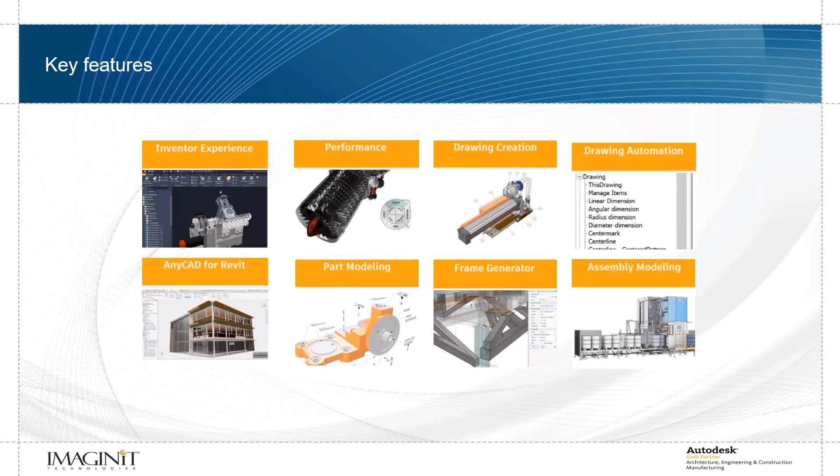So the first one I want to take a look at is just the Inventor experience that you get into, how we actually work with the software. And we have this idea of a dark mode now. The software has moved to this instead of having that really bright screen in front of you. My presentation today is not in a dark mode, obviously it's very bright, and that's kind of where I came from with software, it all looked like that. But now we're moving to these dark modes where it has that same look and feel, but it's got this dark sense to it.

And while this is great, I actually like this. I tend to work in lower light conditions, so not having that screen shining at me with that bright blue light coming off of it. I like the idea of the dark mode. It's almost dark mode though. So this is cool, it's easy to switch, and I can show you in a minute where that's at. It's an easy switch to that, but not all UI elements are affected by it.

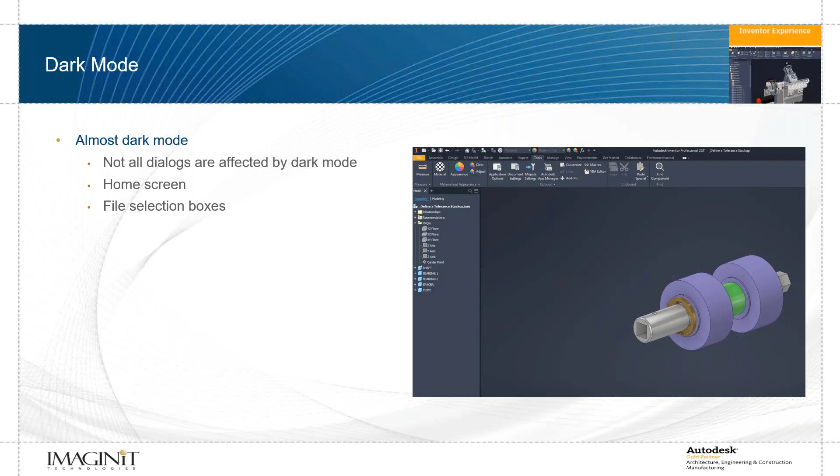My home screen, file selection boxes, projects, I think some Vault stuff - when you hit one of those, it becomes very clear that this is an ongoing process. Most of it's dark mode. I heard someone refer to it as a partial eclipse mode because it's getting close, right? They will still have certain things. If you're not careful, you will need sunglasses. If you're in a very dark room, working along, and you go to open a file, it will be very bright. So dark mode is cool, and it's almost dark mode.

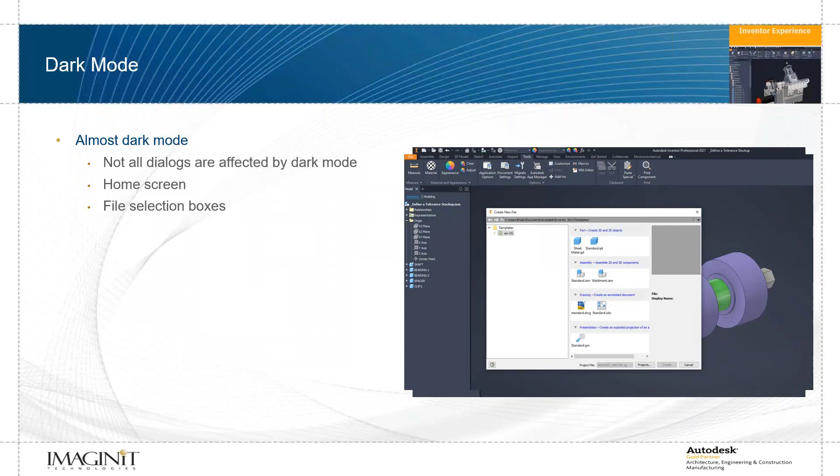We're getting there. The user interface continues to change, and this is something we have seen change, update, and generally speaking, has changed quite a bit since we've gone into this. In the past, we saw the hole command went to a property dialog box. And we saw the extrude and revolve move to a property dialog box. Now we're seeing a lot of other tools begin to move to this properties dialog box.

For me, I know when AutoCAD switched, for example, to the ribbon from the standard toolbars, it was a hard move. I was fine with it, but I get that - you're used to something and it switches. This doesn't feel like that to me. These properties, this just makes sense how this works. Instead of having this dialogue that's in your face, these appear when we need them, and they go away. So personally, I like it. I'm glad we're moving toward that.

So all of these are in here. A couple more, I think decal is going to be one of them, and there's one other that I can't recall right now that's been added to this. So this is almost all of the geometry creation tools that we're typically used to working with have now moved to a property palette set. And that's one of the big things Autodesk is focusing on right now in terms of the interface, moving it to this modern UI experience and changing that user experience so it's much more intuitive, much more heads up, and we can just work in a straightforward manner.

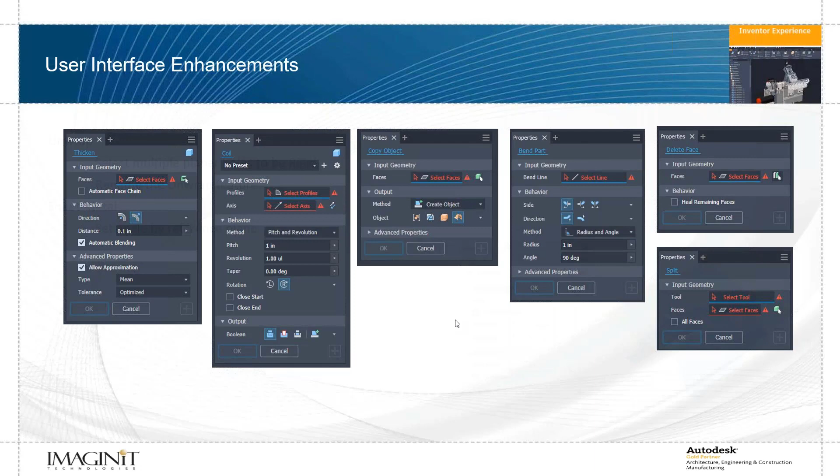With part modeling, there's just a couple of things that stood out, and they're enhancements to tools that are already there. I like to talk about the things that really have weight for me, and this one doesn't quite as much. But the unwrap command, this came about last year, we saw some of that. Now we can select multiple holes to be rigid - before we could select one hole, now we can select multiple so that it locks it down, and it changes the way the unwrap feature reacts. You can also now rename the unwrap feature. So it's just an extension of some of the tools we had before.

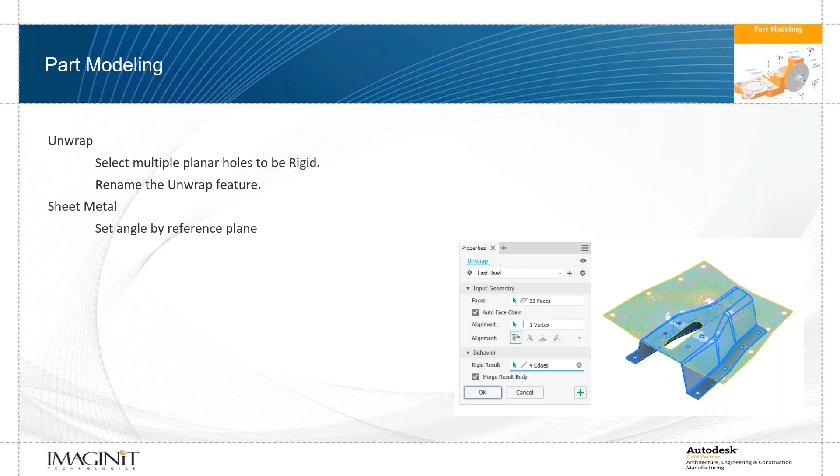With sheet metal, if I have a plane that's at an angle, I can set my angle by choosing a particular plane. Before we had to put in 60 degrees, 46 degrees. Now we can have that driven by an angled plane, and it will change and update with the angled plane. So, again, it's an addition to what we've seen before. It's not, to me - that's cool, great, some new features we have, but that's not something that jumps out at me.

One other thing I didn't include on my slide, but I was playing with it: you can select features by windowing now. Before, we could only do it by clicking and holding control and clicking multiple features. We can select features via windowing now.

So part modeling is getting pretty mature. There's always a few things I'd like to see. Last time we saw the solid sweep, which was a cool addition. I'd like to see some changes happen with sheet metal. But overall, the part modeling side of Inventor has become really robust and mature, so we're not seeing as much change or updates to that.

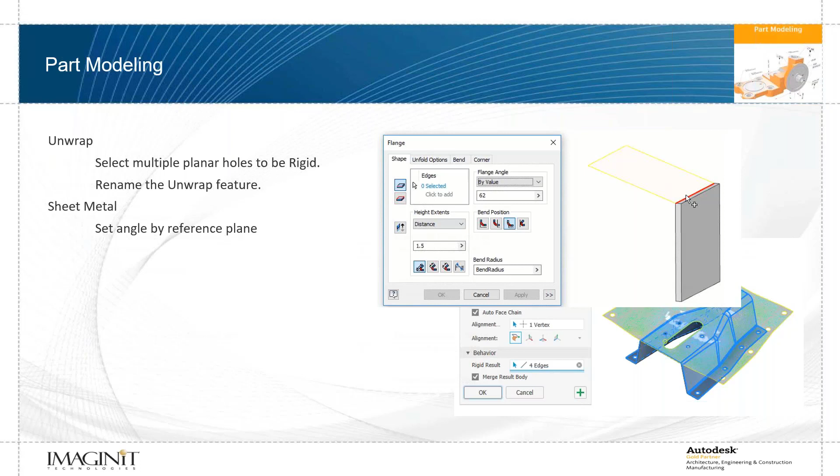Assembly modeling - whenever I think about what I'd like to see in assembly modeling, it'd be interesting. I like that they added joints. There's some things I'd like to see with constraints - I'd love to update constraints a little bit and do some things, but I don't really have an idea how. And then something comes along like this where I'm like, man, I didn't even know I needed that.

The file naming enhancements that started with frame generator, we're now seeing with mirror and copy, where I can specify in Inventor how I want a file to be named when it's mirrored or copied, or more importantly - I'll show with tube and pipe in a minute - I can call out every single part of that. This becomes so important when we move to a vaulted system, when we're using another tool to handle that data for us. It's really important that we have those names the way we want them, following our format.

Inventor 2021 has really updated that, so I can create a file naming scheme for these components within Inventor that follows what I'm looking for and makes sure I have unique information for each one. We can have index numbers come in, we can have it in a lot of different ways. We've seen it before with frame generator, and now we have it with tube and pipe, and mirror and copy. So that I like a lot.

Along these lines, this is something I don't know if I knew I needed, but now I'm so glad it's there. When you save a file - and everybody who's worked with Inventor has seen this - you go to save a file and it says, hey, I need to update, you're saving an assembly, I need to update these 3 other files as well. And you're staring at it going, I swear I didn't change those. Why is it looking to update? Why is it trying to save those files? Well, now in the dialog box, it will give you information about why it's trying to save those files.

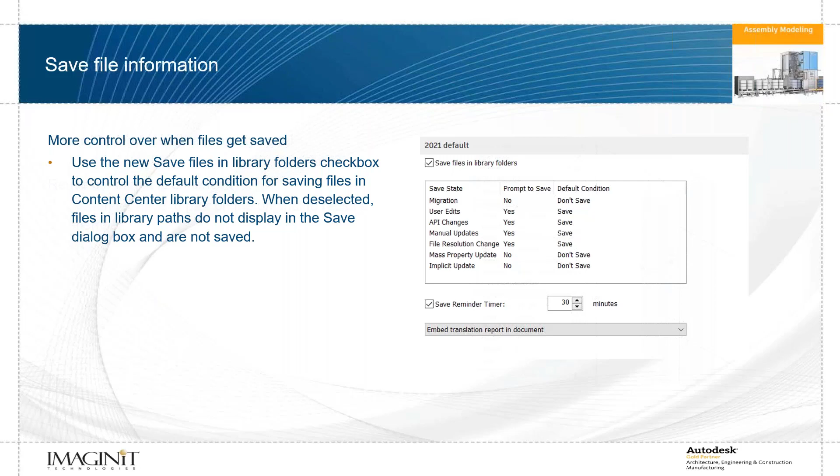All right, I'm going to do some software here in a minute because I like the frame generator. It has a property panel, like we've seen with the other tools that I was showing. They've got the new property panel that's part of that, and frame generator now has a property panel that's part of it.

They've also updated the reuse command. In the past I had to pick on the original member to reuse it. So if I had a whole bunch of tube and I was using these square tubes running across here, and I'm like, oh, I'll just use another one of those - who knows which one of those was the original? I have to really dig for it. Well, now I can pick on any of those and reuse them.

So I'm just going to point out a couple of quick things about just how this works. It's much smoother, it's much more responsive, and just a little bit easier to use.

So I'm going to jump up my Inventor here. I think I am - there we go. So this is, I'll bring this. This is just a little shell that I've created, and I'm going to use it as a frame. And I'll throw this out here.

If you are not using extrusions to generate frames, I will suggest it. It's a great way to leverage - instead of having to draw each one of the sketches out, I just have an extrusion, and I'm basing some of the information just off that extrusion then.

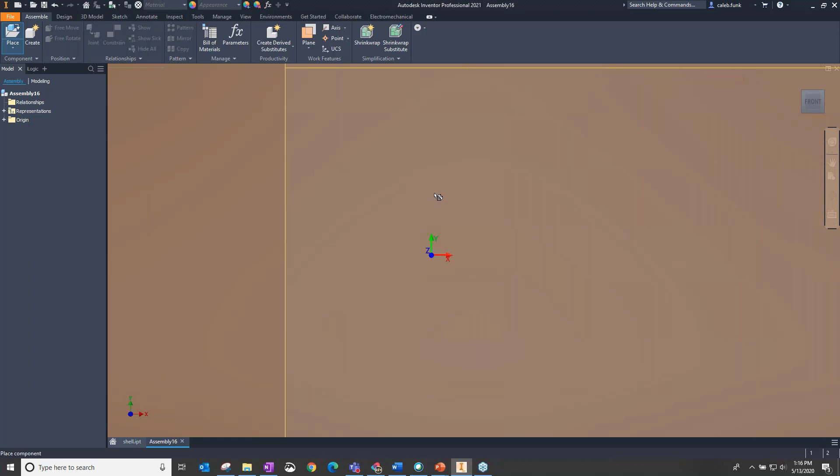So we'll go ahead and just drop this here like I typically would, and I'll go ahead and save that. I'll just give it the same name, that's fine. I went too quick there because it actually had a thing that said how many files are we saving and what are we doing, and I jumped by it.

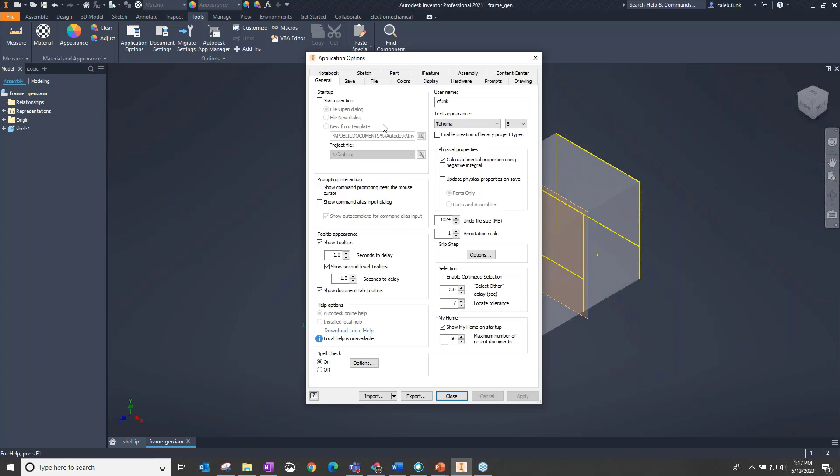A couple of quick things before I jump into frame gen. I mentioned these a little bit, but if I take a look at my application options, it's under colors where you can change that from the dark theme to the light theme. I'm going with the dark theme, especially for the purposes of this.

The other thing I'll point out, I'll just jump back to this. While I'm here, I mentioned all these tools - delete face now has a property palette and some other things. One thing that surprises me, at least it did when I first got into it, fillet still looks the same way, and you'll notice it's not affected by the theme that I have.

I've got my dark theme, and fillet and chamfer, nope. They look exactly the same. Shell does too, and that kind of surprised me.

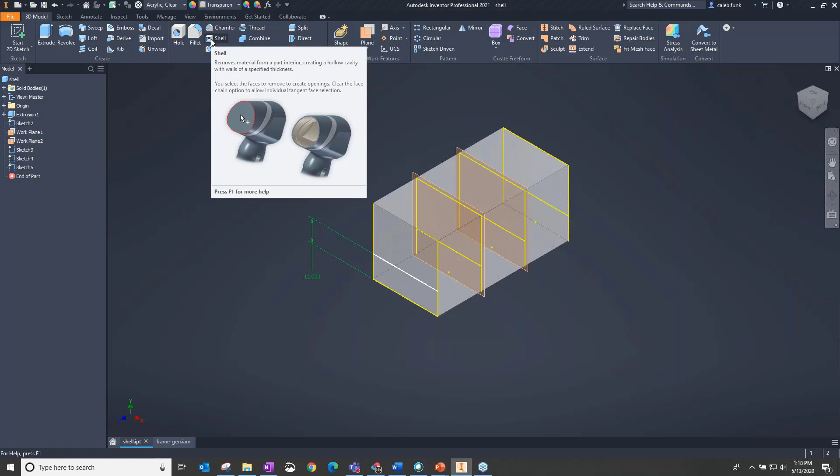One thing I'll say is that Autodesk has been working, particularly with the extrude tool, they've added new options to it. It's not just switching it over to a different panel - they've taken the time to actually update the command as well. So I think we're going to see that in the future, different new options with chamfer.

Total wild guess here - I've got absolutely nothing to go on other than just what I've seen with the other tools. But that is my guess why those aren't there, because it did kind of surprise me when I first picked on it and that old dialog box popped up.

I'm going to go over to frame gen, and I'll go ahead and go in here to my generator. I bring this up, and I'll just go with a square tube, 2x2. Yeah, it's fine, I'll just put in some simple square tube.

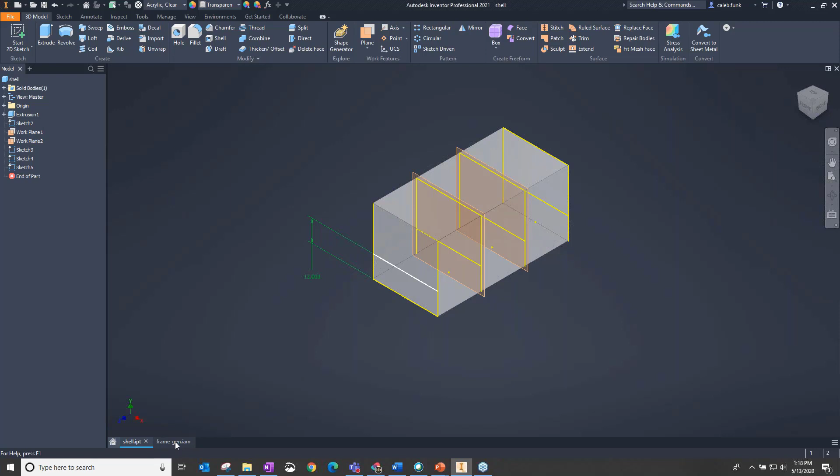So a couple of things I'll point out about this. First of all, we can see here, it really depends on how your lines are drawn in terms of which direction your frame is going. Everybody's experienced that - sometimes, oh, I didn't realize it was going to go that way.

Now I get a couple of things. I get a profile of what I'm going to be working with, and it shows me what it's going to consider the start point. And as I move around this midpoint here, you can see it switch back and forth, but I'll go ahead and place that one there. So I've got a start point and an end point for it. And this is just some feedback we just literally didn't have before.

What was a start point, what was an end point - actually, I don't want to use that one. I apologize, I'm going to cut back in because I'll just reuse that. I was just figuring out that start point and end point thing. So I'll say okay, yeah, let's go with that. That sounds great - put one across the top and one here in the middle, sure.

And I'll say okay. So my naming - you notice I've got frame and it's got this name that comes out here and it goes on. It says a skeleton, and it's got a similar name, but it's got an 80 instead of 79. I'll just point this out real quick.

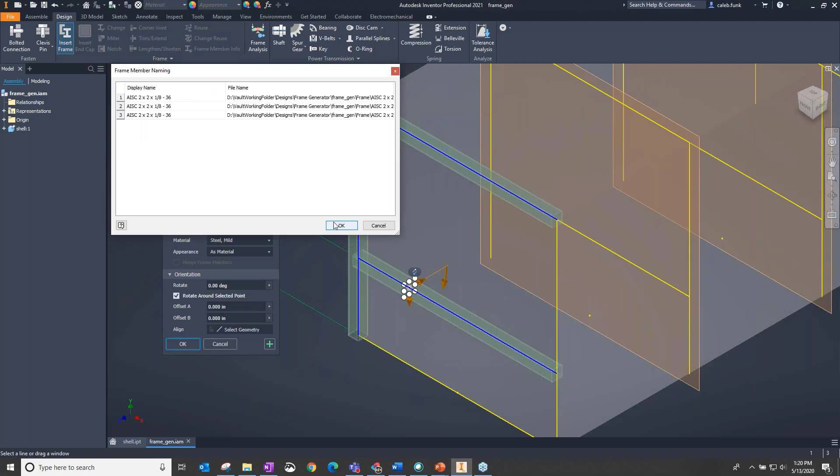I'm just going to accept my defaults for that. And I have, again, back here under my application options, where I go to my file naming, I've got all these file naming defaults now. So I can understand if I've got a file, what do I want my frame assembly to be called? And I can come in and add things into this, such as file name, the project name.

If when I put in an end cap, do I want just the content center display name, or do I want the manufacturer as well, or do I want a part number associated to it? A frame component itself, how do I want it named? Do I want other information in there? Do I want a project standards stock number? Again, on and on - I can call all of this out.

And as I mentioned earlier, that's also true of tube and pipe. And wow, if you're not familiar with tube and pipe, this just looks crazy. But these are all the types of things and components and pieces that are created when we do a tube and pipe run. And before it was just like, hey, run 01, good luck, you know, and route 01. Now I can come in and be putting index numbers associated to them. I can associate the file name to them so that I've got uniquely named tube and pipe runs.

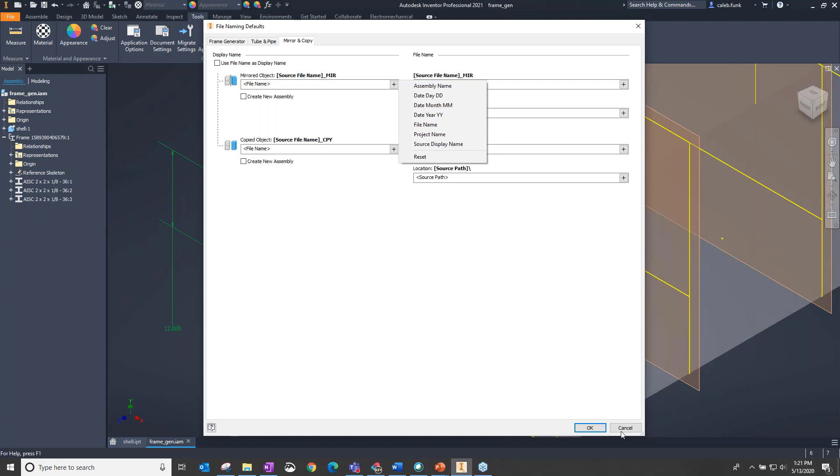And then the mirror copy, you'll notice very, very similar. I can include things as well as in mirror and copy - the day, the month, and the year if I wanted to, so I could tag exactly when that was copied, link to an assembly, and so on. But that's what I wanted to show. It's down here under my file naming defaults - when I get into creating these components, that's where that's coming from.

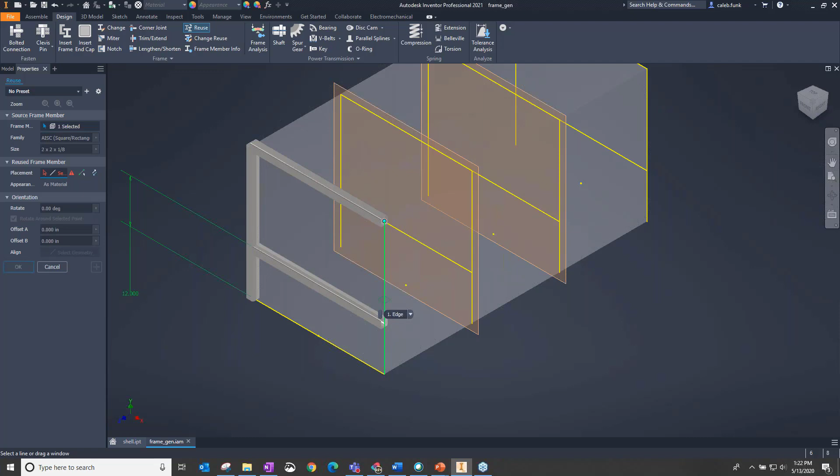Looking at my frame information, I'll go ahead and do a couple of quick additions. So I've got reuse, and reuse again, we've got a property palette here. I think this has become much simpler to understand. I'll pick this and say I want it to go over here, and you'll notice I get that same glyph I had before, so it's clear which side, where it's going, how it's being placed, what it's considering - the top, the front, the back. It's just much easier to use.

Now, I actually got out of that command, and that's typical Inventor - that's very much how I think of using the tools. But I want to put another one over here. This is what I was mentioning earlier - I don't have to go back and pick this one, I can pick any of those.

Notice that it jumped there all the way back to my original. So basically, they've taken it off of you to have to worry about reusing the original. You can pick on any one in the set and it knows, oh yeah, I got that - it's right over here. So now I can come in and place in my others as well. I just do those adjustments. If there are any treatments on this, they would go right along with it - it takes the treatments along, it takes all of that information as I go in and reuse that.

I can even go so far as to window select things. So I could begin window selecting and pulling all of that so that it's easier for me to grab that information that I want to reuse as part of that.

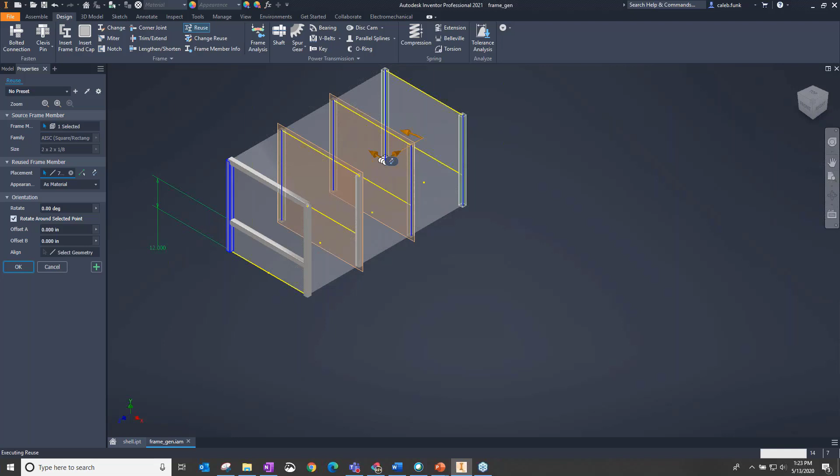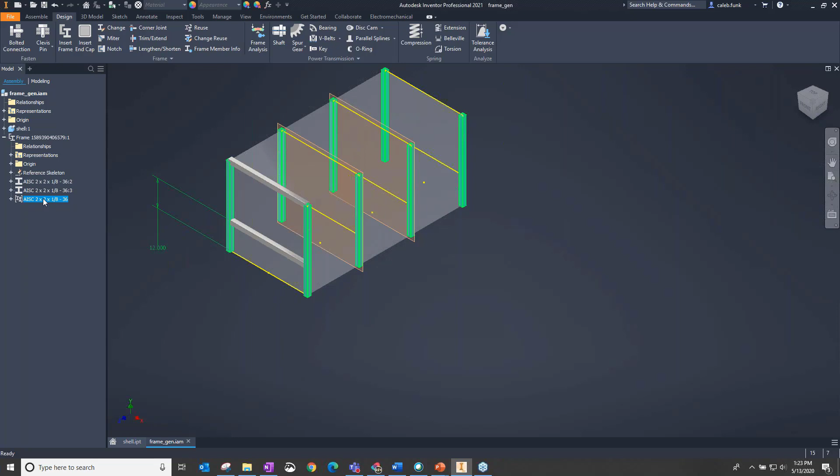And now what we have within the browser is that series of those, right? So this isn't really a subassembly, it's really a folder that's in here. But take that, put it into a folder without me even realizing I had to worry about it, and it now contains it, so I've got my information in there. So I really like how that works - I think that was a good addition. It was sometimes very difficult to pick out exactly what we were doing, looking at a particular model, looking at all of that.

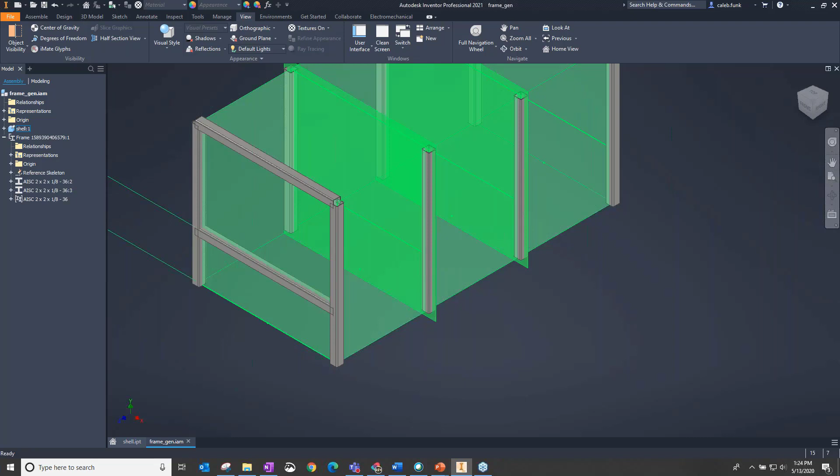So I like how the frame generator has been updated so that we can select that information, and I like how reuse has been updated quite a bit. Frame generator, between the renaming and how we can reuse those tools, I think has been a great addition to this.

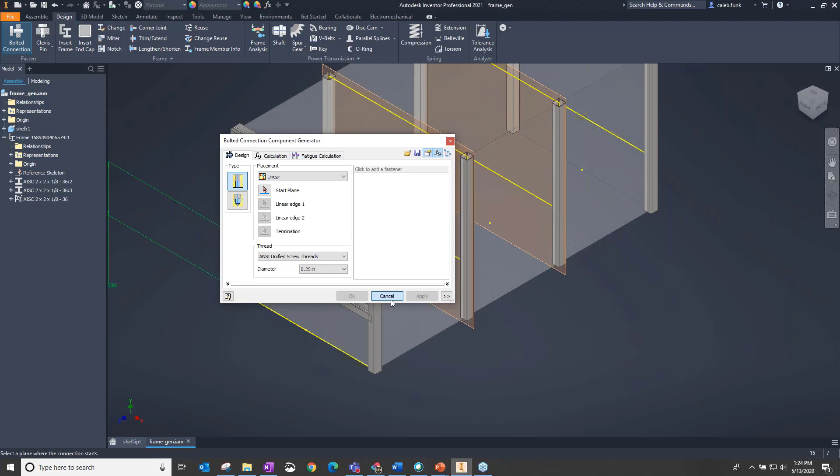One thing we can concern ourselves with now - bolt connection still has this older style dialog box, but I can turn on or turn off the subassembly structure. So if you have a bolted connection, it always used to put in a subassembly with the components in it. By default, that's turned off now, and it will put it in a folder with those components. We'll end up with those individual components, but we won't have the subassembly like we used to in previous versions. So it's a minor change, but just one less file to keep track of, one less thing to concern yourself with when you're looking at that information.

So frame generator, property panel, reuse command has really been enhanced. I like what they've done there, so that I can select that a lot easier. So that's a big one for me with the way the frame works. This one is kind of huge.

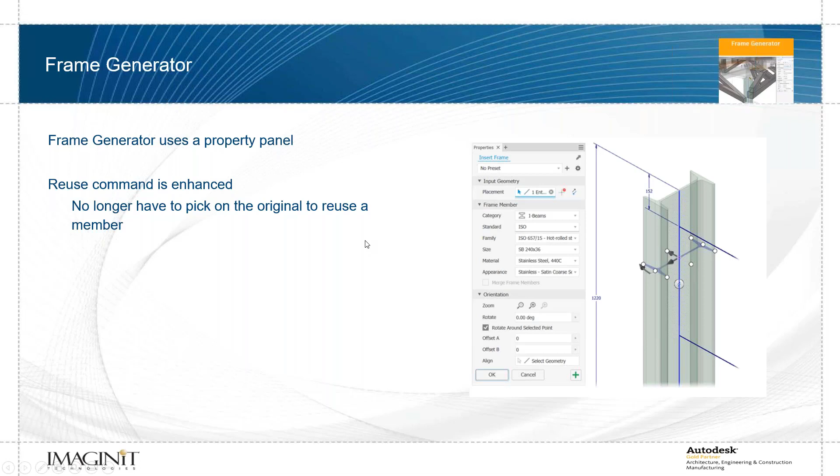We now have AnyCAD that works with Revit. Back in the old days, everybody just used AutoCAD, and it was super easy to share our drawings - you just sent someone an AutoCAD file. And then as these differing softwares came out, with different abilities and different specializations, everyone got dialed into using one, and it became, of course, harder and harder to do this.

So at some point, a lot of times these things are going to matter. I may need to, if I'm working with someone and I say, yeah, I'm going to build a unit that's going to go onto your building - we've got a heating and cooling unit that's going to go in there - I need reference points from Revit so that I know how we need to locate this.

Or looking at it the other way, a lot of times instead of a heating and cooling unit, we've got whether it would be some sort of curtain wall structure that still we're designing in Inventor, but ultimately needs to go into an architectural component. Either way, we need to reference those.

So now we can bring in a Revit project with AnyCAD. Inventor can reference a specific 3D view - so we can bring in a specific 3D view, and only the objects visible in that view will be loaded into Inventor. That is really important.

A lot of times I may be building an awning, a curtain wall, or a transaction window for a bank or something like that. I'm not concerned with the HVAC, I'm not concerned with any of that. I just need this area so I can pull it in and begin working with the transaction window.

So that's one of the tools that allow us to use that, but we're going to need a lot of communication to be able to use it well and discuss that.

So what I'm going to do here is go get my Revit file and bring it in. This is just file open, just like I would with anything else. Just like I can select Pro-E files, CATIA files, or SOLIDWORKS files, I can select a Revit file - that's one of the options I have.

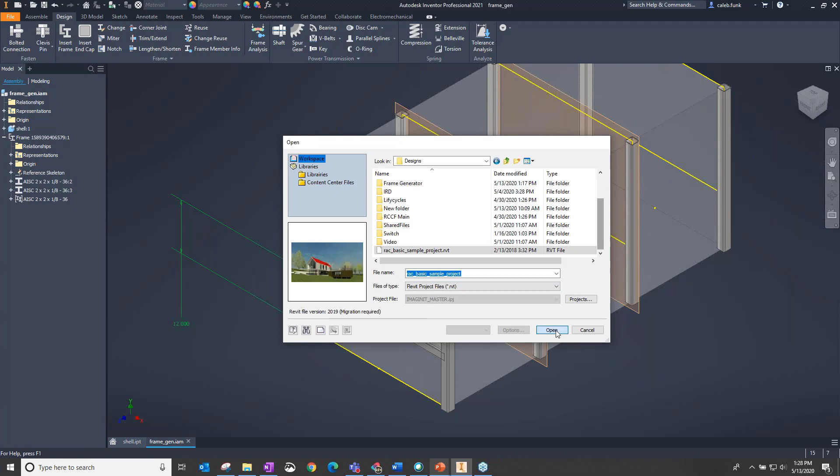And when I do, it's giving me a warning that it's an earlier version of Revit. That's fine, we'll say go ahead. It's not really going to take too long here - so it's taking a look at this project.

And with AnyCAD, if you haven't used it, the big trick here is I'm going to reference this model - I'm not going to convert it. So this is going to be a link to the model that I have, and if the initial model changes and I get an update, I can bring it into here and use that information as part of this.

So it's going to take a look at this whole Revit model - taking a look at the view list, looking at all the things. Here in a moment I'll get a list of the 3D views that are available, and then I can choose from that. In this case, this is a fairly small project.

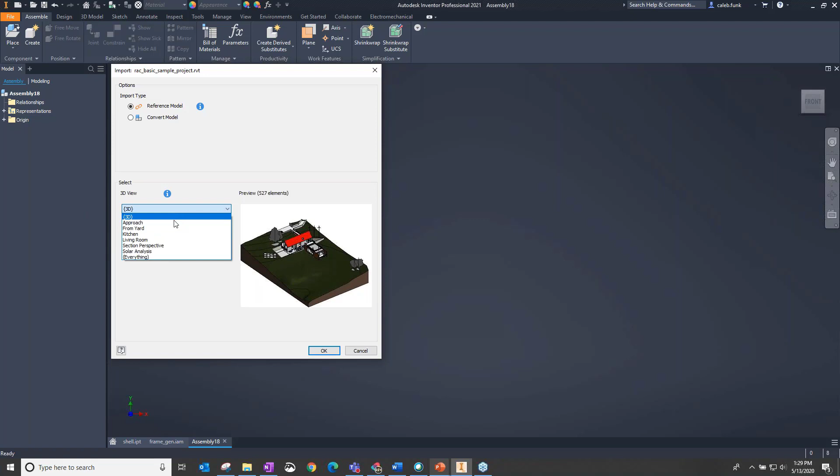So one of the things we'll see is I really am going to load everything into here - I'm just kind of grabbing everything and pulling it all in. Typically you would get one that has a smaller subset. So here's my whole general overview, here's the preview that's just the kitchen, and here's a preview that's just the living room. All right, so I've got these different views in here.

I'm just going to do this one called approach. Now it's going to yell at me here in a minute - I've got 527 elements in my preview. As I go through some of these different ones, most of this is just generally everything, right? It's a small enough model that I'm really looking at everything. Nothing is turned off. I'm going to go ahead and just say okay, grab that.

It tells me, hey, this is pretty big, it'll take a minute - but you notice it doesn't really take too long at all. The idea is that a Revit user could take that model and essentially simplify it. Really, they're just turning things off on their end and then generating a view for you that is really straightforward and has only the information that you need to see for your particular project.

So in this case, I'm going to bring this in.

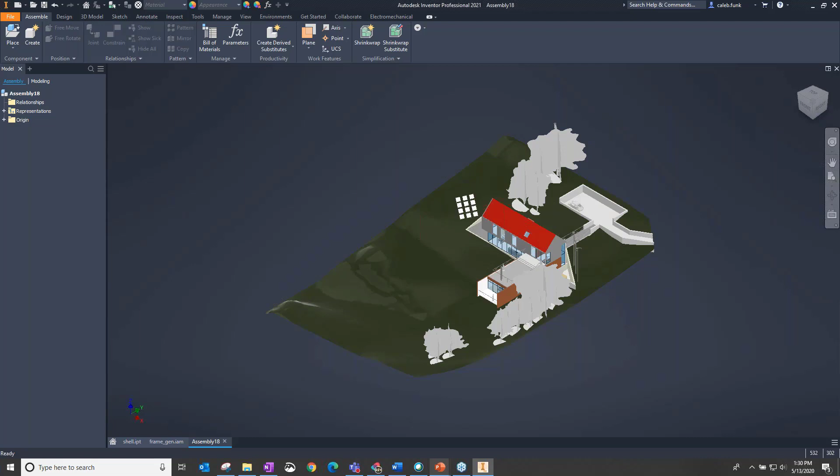One thing we'll talk about is Inventor performance in general and some of the areas they've worked on. It surprises me, having used Revit in the past and knowing the complexity of these tools, how smooth this is once it all loads up, because we can move around and work with this. I've got my whole plan, everything in here, and it's surprising how quickly we can begin moving around and working with it.

In my case, maybe I'm building a security screen that's going to go over the top of the skylight that's been placed into here. The crazy thing is I can work on this just as if it were an Inventor part. I can come in and say, hey, I'm going to start creating some components.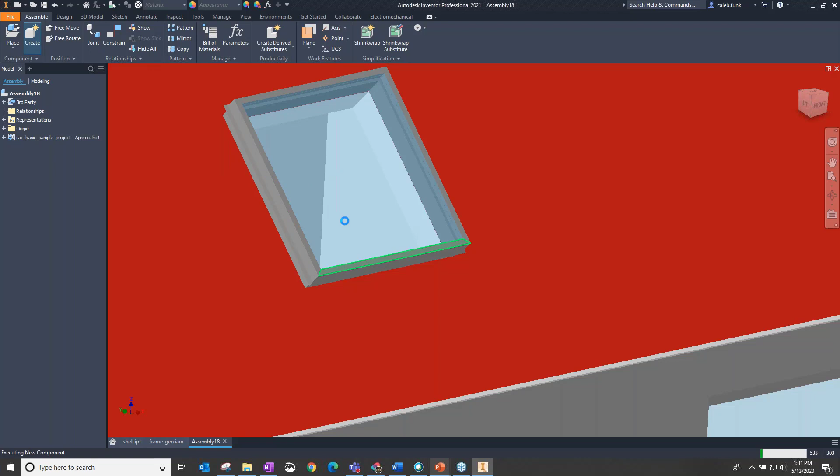I'm going to start a sketch on this, and I can begin leveraging the information that's already on this existing model, building my sketch, extruding, naming it. I can project this geometry here and use that as a basis for what I'm going to begin extruding and working with. So I can start my security screen and say, all right, sounds good.

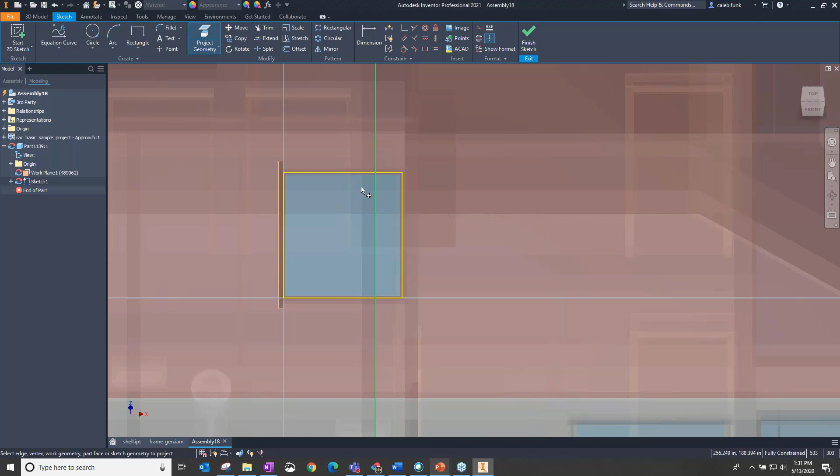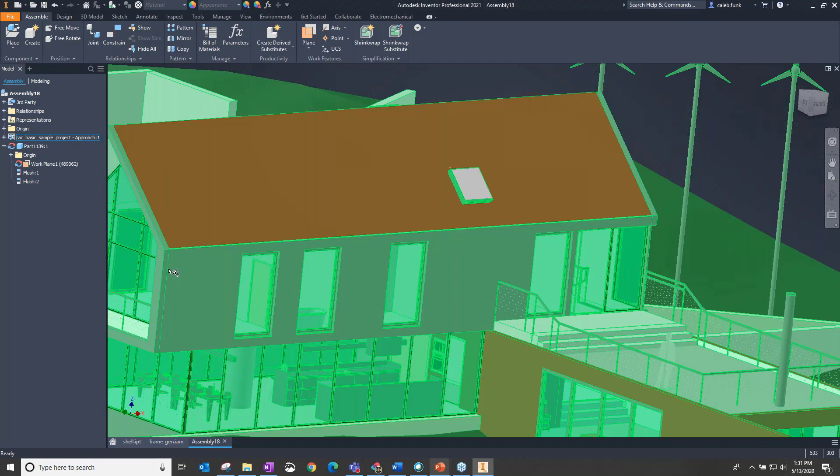Now I've got Inventor components linked directly to my Revit model. Of course, I could go through and filter this out and do whatever I need as part of that. One thing I'll point out is this does have everything in here, so I can come in and control, turn off the visibility of all my doors in the model, turn off the visibility of whatever. So I have control over what I want to see once we've gotten to this point.

But I can't create my own separate view like they can within Revit, where it's a simplified version of that. I'm literally just turning off what's visible and what's not visible. So, well, you know what? I don't need this topography information, that's for sure. I can't do anything with that.

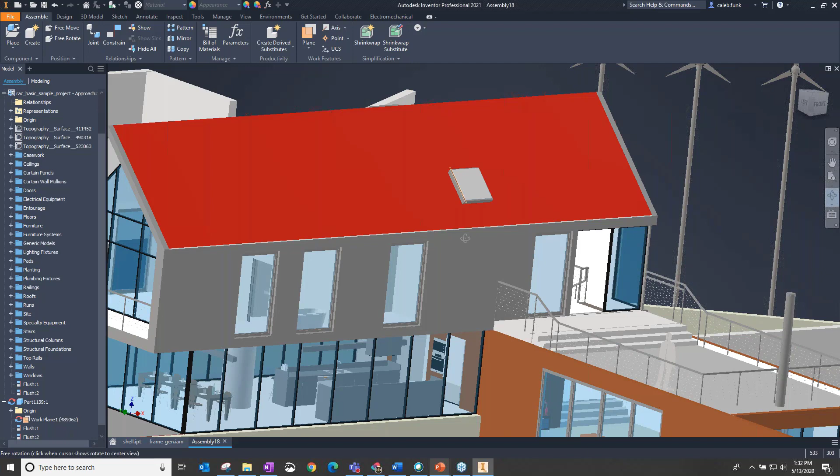So now I can simplify my model, simplify my view, and build off of it, right? It's amazing what comes in, what level we see this information at, and the fact that I can leverage that going forward. Something I've been looking for a long time. I think it's a great way that we can use to edit this information here. So very, very cool. That's probably one of the big wins for me: the way that FrameGen works now and the fact that we have that AnyCAD in there.

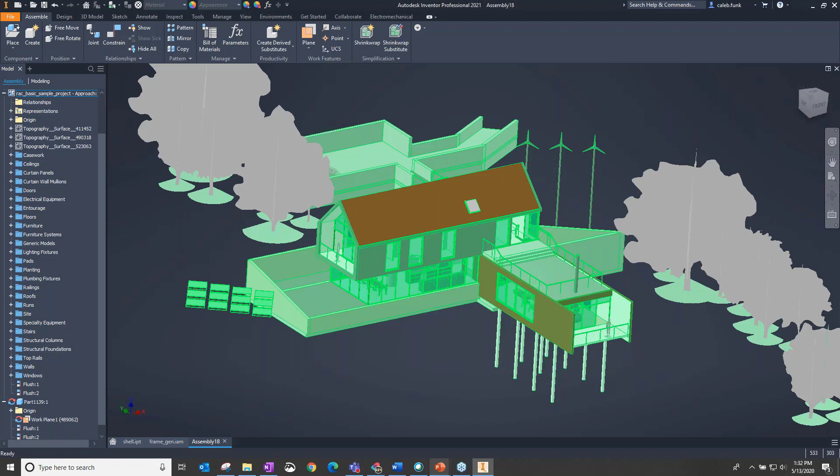Another big one, gotta keep my eye on the time. So sheet layouts and sheets, there are two big things with sheets in general. One is the sheet layouts that are part of that. If you haven't used sheet layouts, it's basically a way of setting up which views you want on a sheet beforehand. I can say I always like to have these three views on a sheet of this size, and that's a sheet layout. You can also include bills of materials, general tables, and notes with that. We can also save a sheet metal flat pattern with the sheet layout.

Now, these have been around for a long time. Sheet layouts have been around forever. So if you're an old Inventor user, you're like, yeah, I remember those, but I never really used them because you had to create a new drawing and then activate a sheet layout. It worked, but it wasn't a clear workflow, and it wasn't one that absolutely everyone understood immediately.

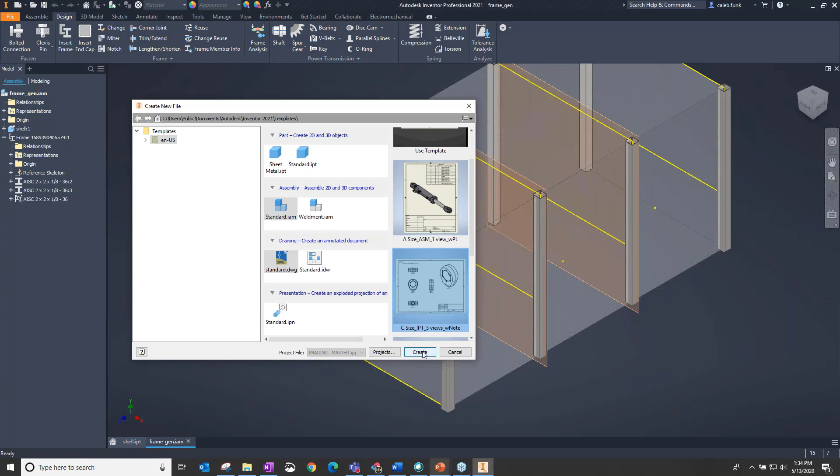So now, when I create a drawing, I get an extra window, and I can see these are the sheet layouts available to me within there. So not only do I have a template, within that template I've got various sheet layouts I'm going to work with. I'll go ahead and select one here and say, let's go ahead and get this C size. So let's create it off of that. And it says, well, that's fine, what document do you want to use as part of that? So now I can go along and select which file I want to use in there.

And it automatically generates the file for me with views in place, including any standard notes that are part of that.

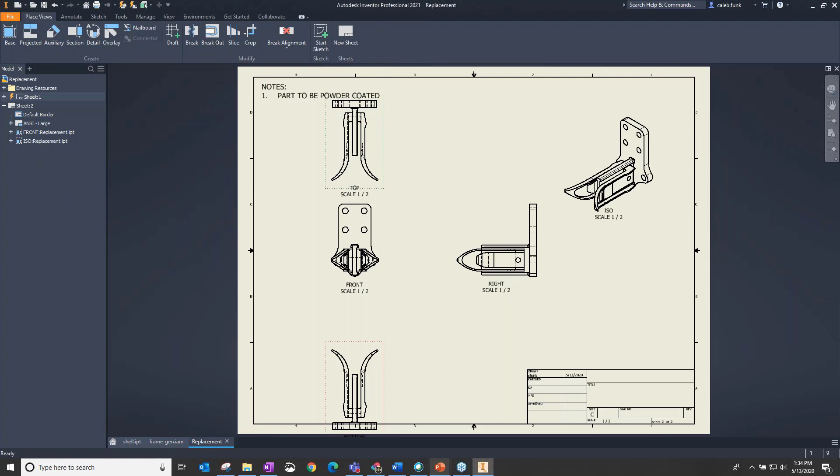Sheet layout - these have been here in our drawing resources all along. I can create sheet layouts, but it's really nice how I can easily say I'm creating a new one, using this, grab this part, and away it goes. I'll just grab the same part another way. The other thing I didn't mention is I can use this - I'll grab this one. So different sheet layout, different information, puts it in there.

I've even got a bill of materials in here, calling out some info. So what a great tool, what a great way to begin setting this up. The thing I would say about this is it's so much easier to use now.

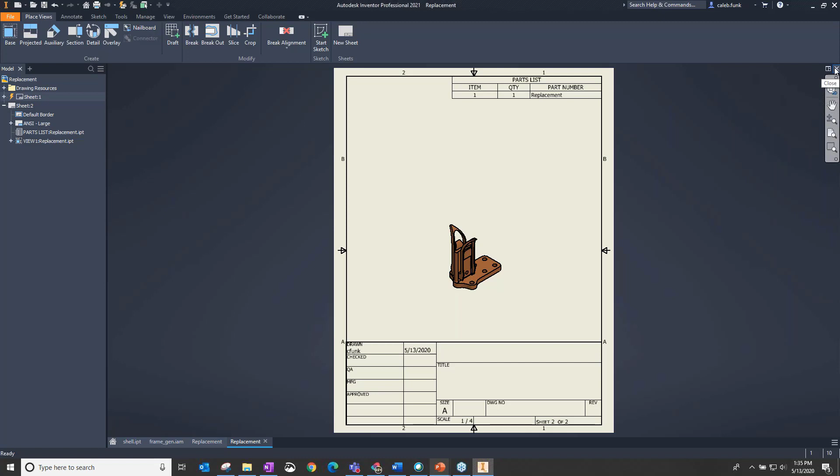Sheet layouts have been around for a while. I can now set it up - if I go to save a sheet layout, I can save any sheet as a sheet layout. I'll create a sheet format. I can tell it to fit views to the sheet, so next time if I brought in a model that was much larger, it would automatically scale it to fit the sheet. Now anytime you hear the word automatic when it comes to software, it's 80%, right?

So there's going to be some adjustments, some moving. This was longer than other components, so it overlapped my prints and my notes. But what a great way to do that.

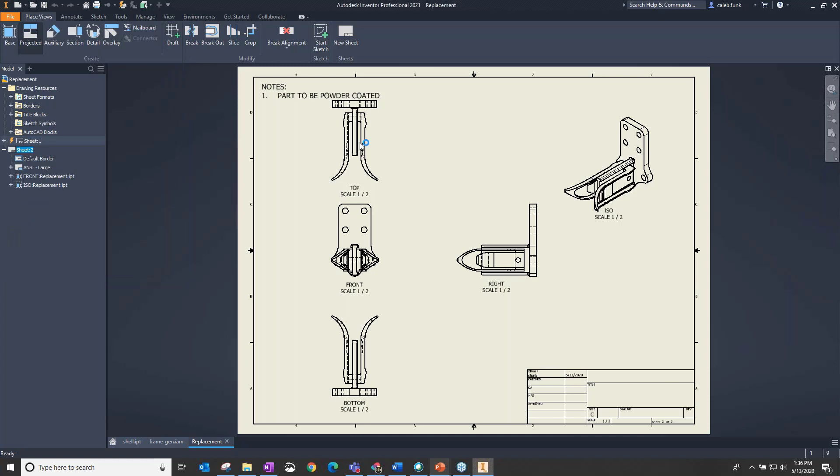And this is nothing you have to do, nothing you have to turn on. It's just when I go to look at drawing, all of the sheet formats that are available include the size, whatever views, whatever text I have on there. Those sheet formats are automatically ready for me - you just select one and use it. It's a great tool, a great enhancement to tools we've already had. I really like the way that's going to work.

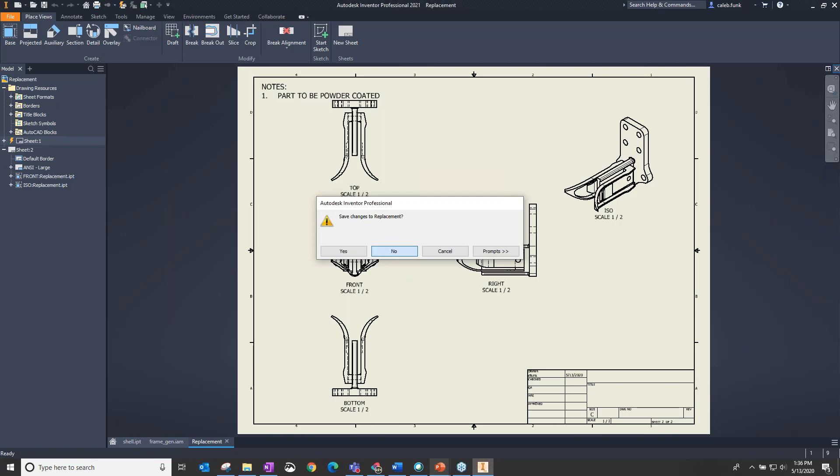Okay, I'm going to jump back to my PowerPoint for a second. So sheet layouts, flat patterns can be saved with them. The view can scale automatically, they're there and ready to use - it's a great addition to that. So that's the drawing information updates.

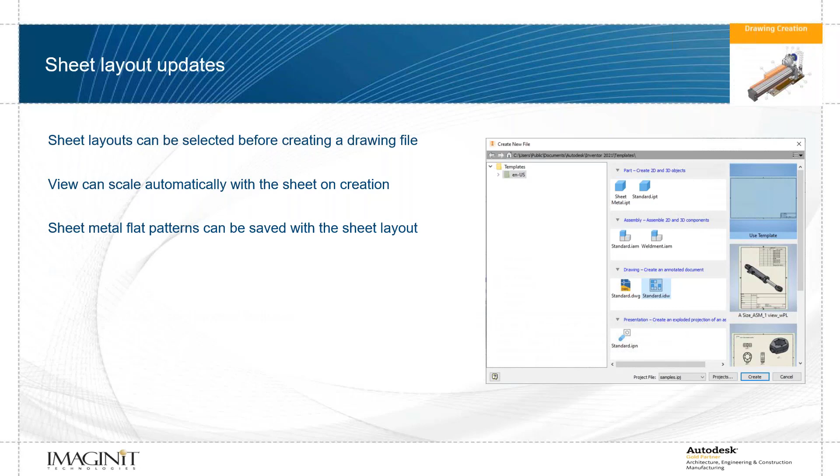Right along with this, if you do any type of automation at all, it becomes important. iLogic has some more tools to support drawing automation. You can add dimensions, hole notes, balloons - this is all done to labeled features, but this extends what we've seen in the past. There are iLogic rules that we can have in here where we can generate drawings, generate views. It gives us access to that.

So you could do this before with some API calls if you were familiar with that. Now it's more in line with what we've seen with iLogic with other features, where we can easily get to this - it's got some snippets of code, some built-in rules where we can begin working with that. Drawing automation has been a big push that we've seen. This can obviously get pretty deep pretty quick with everything we're looking at, but I want to show an example of creating some drawings and a couple of pieces with iLogic and this type of automation. So I'm going to jump back here to Inventor and open up an assembly.

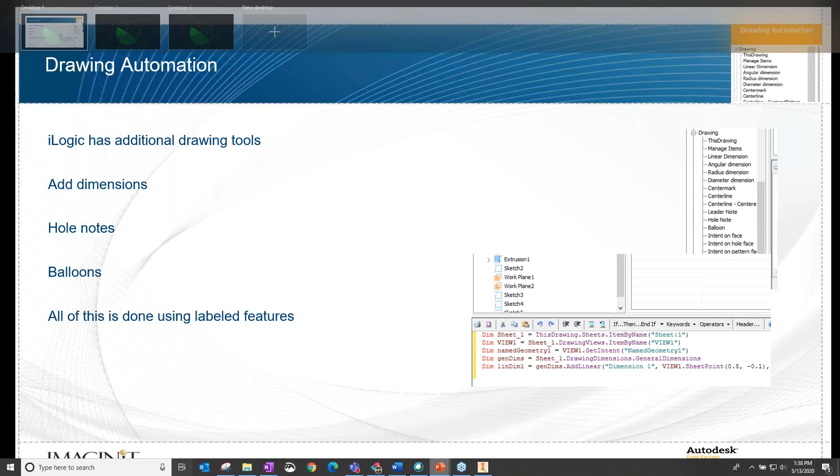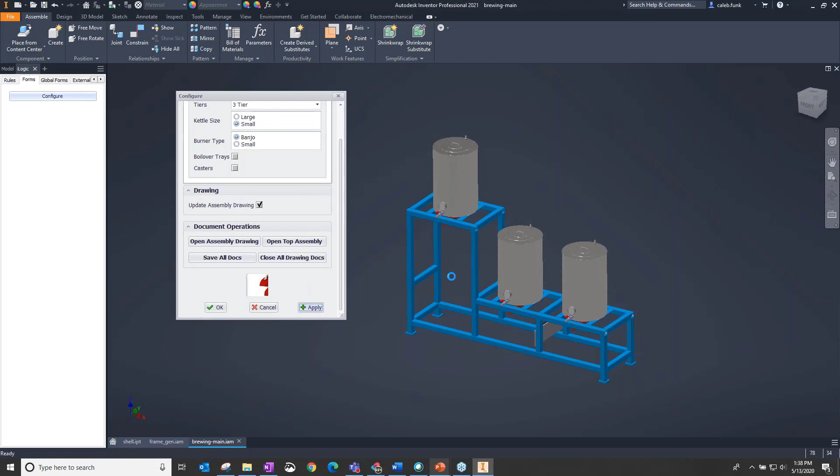So to go through, here's my adjustments. This is the iLogic type of thing we've seen in the past, where we can have those multiple tiers and work with all of that. It's very common - this is what I think is amazing. With the iLogic automation that we have now, we can link all of this together.

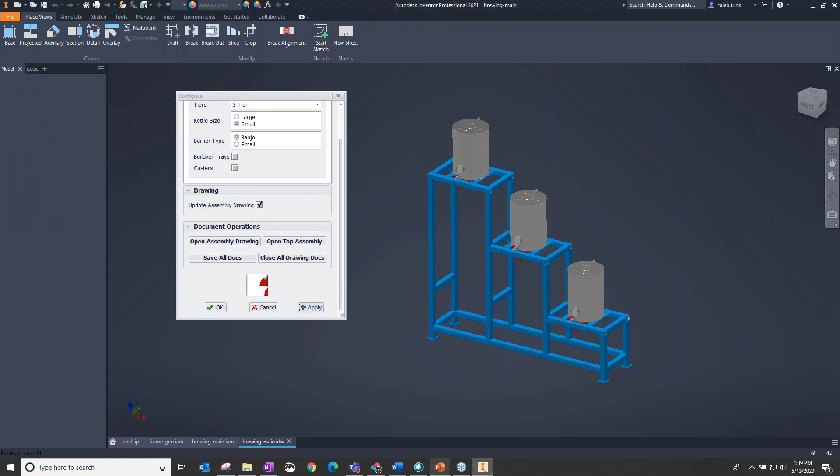In this case, I've got my drawing that's going to update and adjust along with it. And I can even go further and say, it's nice that we've automatically updated the drawing, but I need component drawings. Do I want them to be separate drawing files, or do I just want them to be sheets in the drawing I'm working with now? I'm going to say, let's do these as sheets as part of this.

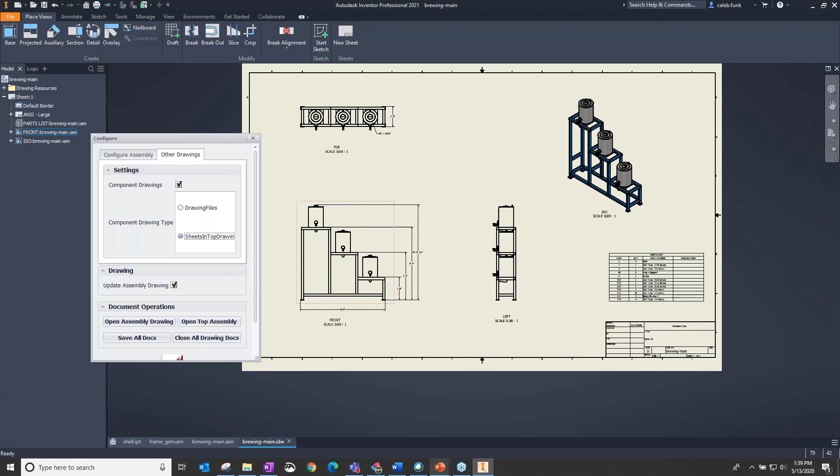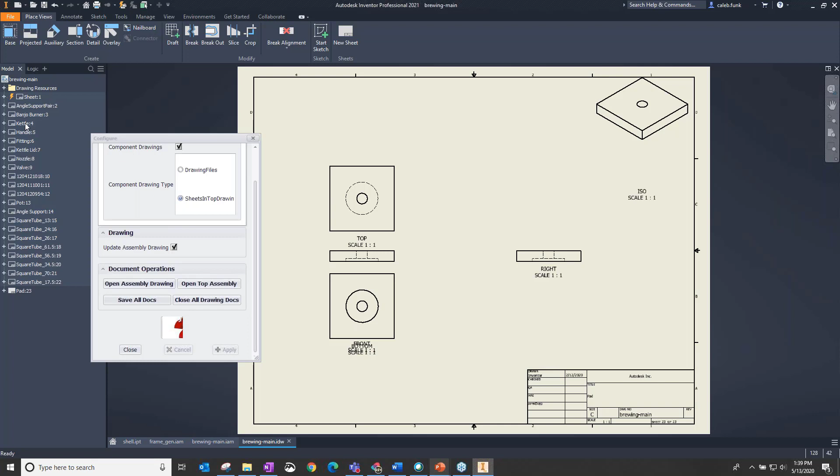So now the iLogic tool has gone through and added every component I have in there using sheet formats, like we saw a moment ago. It's added them all as sheets, and I can now begin detailing them out. You notice I've got the option to do separate drawing files or sheets in this drawing. So I went through and grabbed each piece, every component, including every single tube. Now I've got it all where I can call it out.

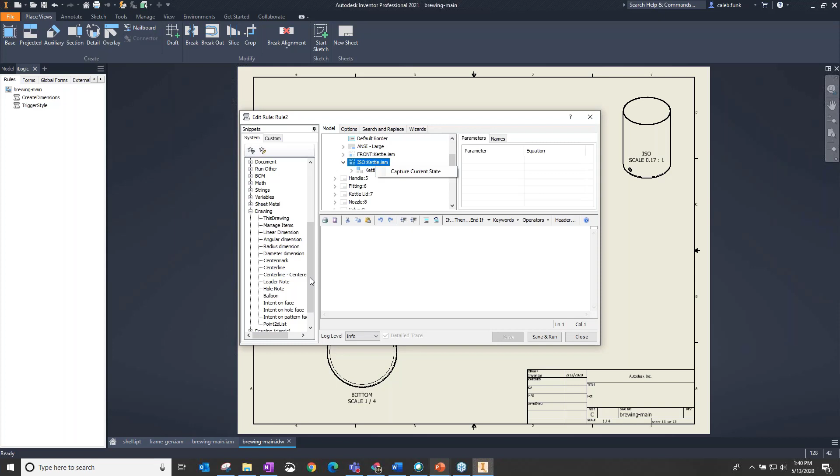Within iLogic, if I take a look at my rules, there's my forms. I'll just create a new rule. You can see I've got all of the different information. I can capture current states right off the different views, get all of that. And I've got a new tab in my snippets for this information, where if I want to worry about a diameter dimension, it puts in all the variables, declares them for me, calls them out, and gives me the information I need to generate general dimensions off of something.

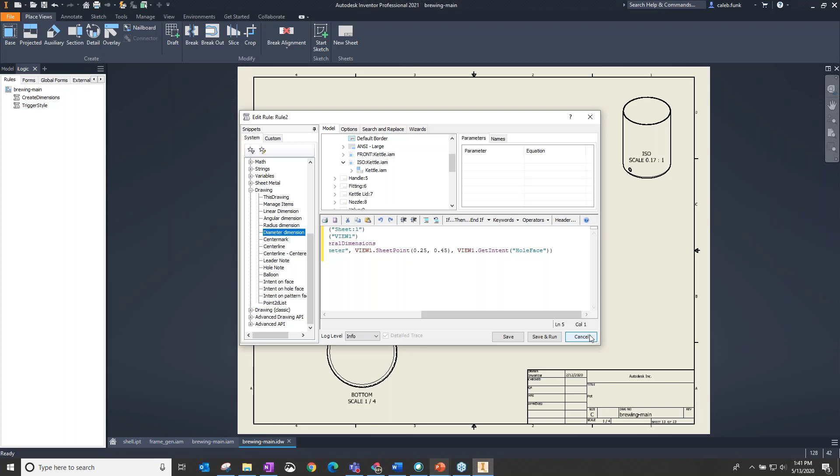Now, if we're doing dimensions, it does it off of named features, so this won't just throw all the dimensions on your drawing - it doesn't understand that, it does it off of named features. This level of automation with drawings is a big step forward. It seems like we could get almost as far as we wanted with iLogic on individual assemblies, updating and changing things, but now we can move forward and work with the drawings as well. It's a great addition.

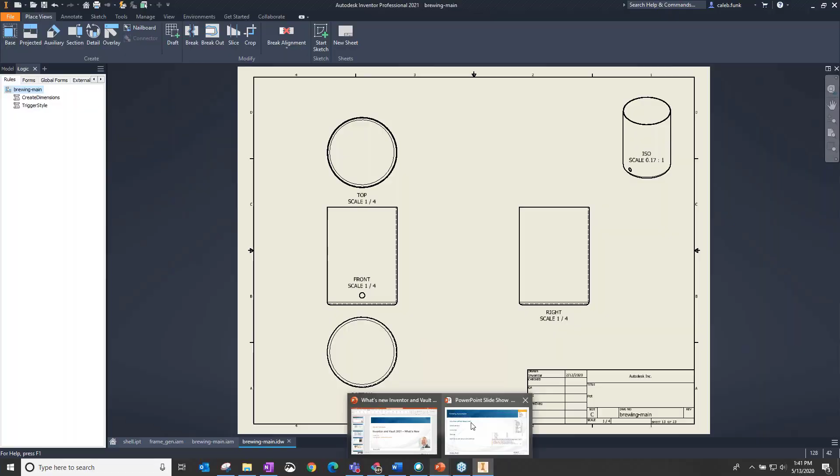In general, and you'll see this, it just calls out performance improvements. I haven't seen any real metrics on this, whether it's 5%, 100% better, anything like that. But it just feels - and I hate to use that word - as you're moving through, you saw that large Revit model I had and how smooth that was to view. All of these different areas have really improved the general performance.

Frame Generator in particular stands out to me. It feels much more fluid. I heard a description of a video game the other day where they said the user feels heavy when you're playing, and I'm like, wow, that's perfect - that's exactly right. That's how Frame Generator felt before - it felt heavy. And as I look at this now, it feels much lighter. That's the only way I could think to describe it, but just the way it moves through shows a lot of focus has been put on this.

And I think this is important. I go back quite a few years with this, and I remember when Inventor first came out, people were building 10-part assemblies and it was the coolest thing ever. It seemed like 5 minutes later they're like, well, I've got a 5,000-part assembly, why is this so slow? I feel like users have always outpaced the software. So it makes sense that so much has been put into performance, because the envelope always gets pushed by the users - as soon as we can do a 1,000-part assembly, we try to do a 10,000-part assembly, and on down the line.

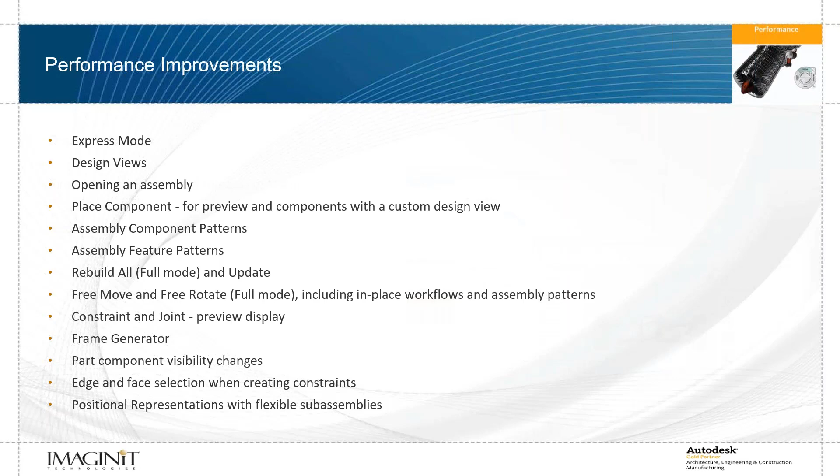Oh perfect, keeping right on my time track. I like it. So that's kind of the big broad overview with Inventor. Honestly, AnyCAD is a big deal for me, Frame Gen, and then there's all those things in the background. And Vault kind of does it the same way.

Well, there's a few key pieces that stand out with Vault. This really, again, shows Vault becoming much more of a mature product. We're seeing a lot of strength in how the tool works.

Some of the things they're adding are very much iterations or enhancements to what we already have. This is also an admin heavy release. So for the end user, which is whom I assume I'm talking to on this particular call, there's not a whole lot for end users. It's much more for working on the admin side, and I'll point some of that out.

Duplicate search was a point release of Vault 2020. We can always search within Vault for file names or particular properties, but duplicate search does a geometric search for duplicate geometry. The example I use is a company might have 8 versions of the same bracket because you can't find it, so you just create another one with a new name. If you look at your assemblies, maybe it even has the same part number, and you realize you've got this thing in here all these different times. A lot of times that's not easy to find. Or maybe you've done a large data load and you've got content center parts from many iterations, and you realize these are all pointing to the wrong thing, but it's difficult to locate that. What the duplicate search does is go through your Vault and look for duplicate geometry.

Just like we have Revit AnyCAD for Inventor, right along with that, it's supported by Vault. So if I check an Inventor file into Vault that has a Revit file attached to it, it will also be checked in. It understands those links between them. And this also works if we attach something with BIM 360. We can have those links, it understands how those go together. BIM 360 is a cloud-based storage application that specifically works with Revit and similar tools. It can really be used for any file, but it can link to Vault as well. So we can check that in with BIM 360, and those will link together. So those are two of the big user ones.

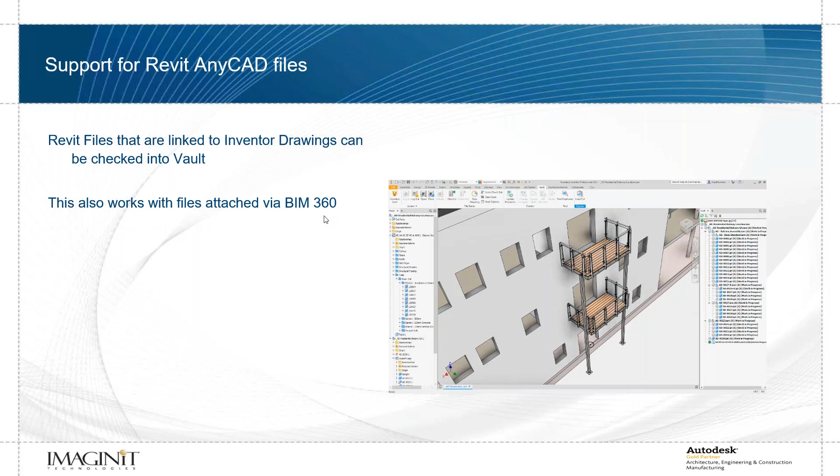On the admin side, we can change the Vault status bar when the admin is logged on. They updated the job queue - instead of 1,000 entries in the job queue, it can now have 10,000 entries, and that's an option you can turn on or turn off.

The big one for me is the idea of a download permission. Typically, we can say users can view the files, modify the files, or delete the files. But if a user gets into Vault, if they can look at a file, they can get a copy of it. There may be instances we don't want them to do that - we want them to just be able to see the file in the viewer within Vault, but not download a copy. Now we have a new permission called download where we can say user A and user B are allowed to download it, but user C can look at it and not download it. Or she's allowed into this folder but can only read the information, can't modify it, and also cannot download it. So it's a very useful addition.

This is something clients have asked me for in the past. They're like, if they are read-only document consumers, can they still download a file? The answer's always been yes. But now we can take document consumers and use this download permission to adjust so that they cannot.